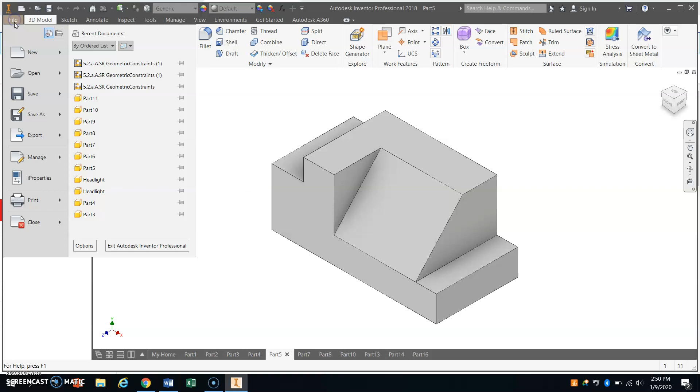We're going to show you another part here. This one's quite a bit more complex and involves a few more tools that we haven't used so far, some parts that maybe you didn't even know existed. So we're going to create a millimeter part.

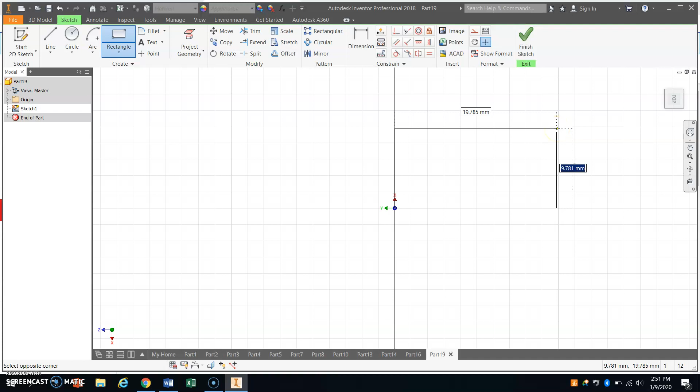We're going to start with the sketch. I'm going to work off of the ground plane to begin with. I'm going to grab my rectangle tool, make a 2-point rectangle, and it's going to be 53 by 26.

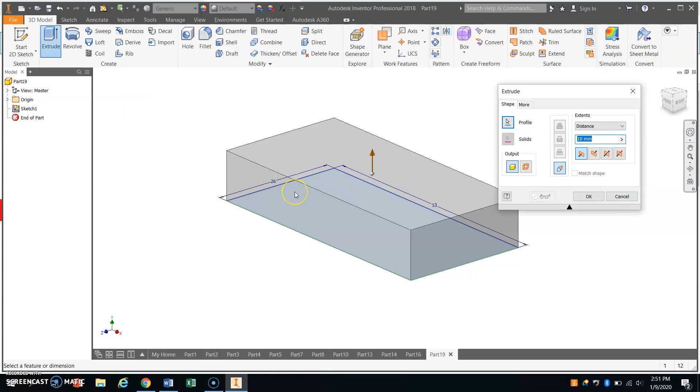I'll fully constrain. I'm going to finish sketch. Drag it in where I can see it. And I'm going to extrude it up, and it's going to extrude up 26 millimeters. All right, I'm going to work pretty quick here.

Next sketch I want to make, I want to sketch on this face because I'm going to take a line tool. I'm going to sketch from this corner. I'm going to bring it up here. I'm going to make this into a giant wedge.

All right, so got my line drawn. It coincides with the origin, and it's coincident with that top line. So I still just need to dimension where that line ends, and that should be 5 millimeters.

All right, looks good. We'll finish our sketch. Let's go to extrude. Now we're going to try to grab just this part, and sometimes it can be a little bit tricky grabbing just those parts.

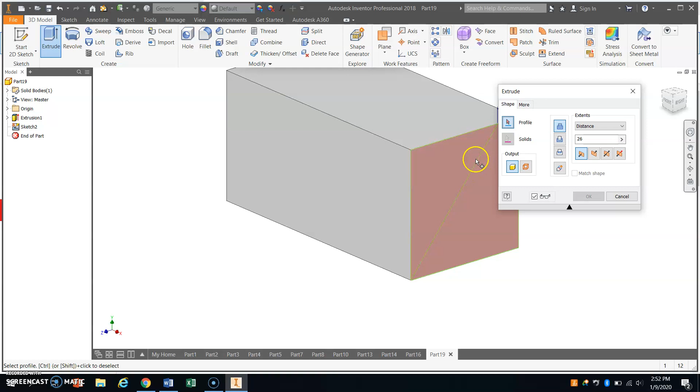If that's the case, what you can do is undo, hit the undo button to go back into sketch, highlight a line that doesn't touch or cut into this area. So I'm going to be safe and select this line.

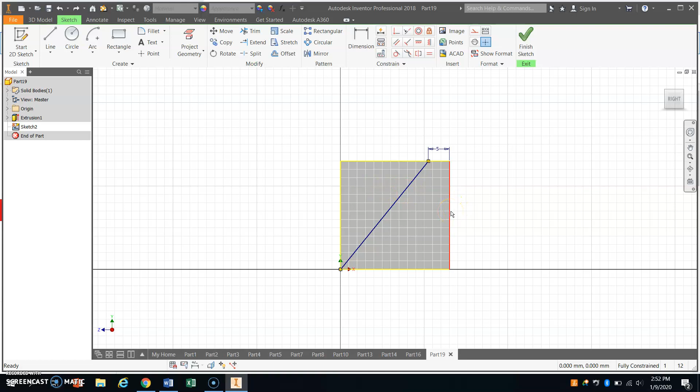When I hover my mouse over that line, it turns to red. I'm going to right click as it turns to red and click delete. That's going to delete that line off there. That's going to make it much easier for me to grab just that shape.

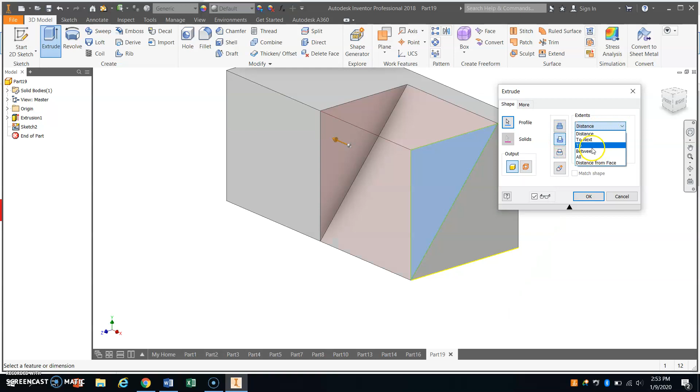So I'm going to go to extrude. You can see that it only grabbed that shape. I'm going to go to cut, cut all. All right, so we've done this part before. All right, that looks good.

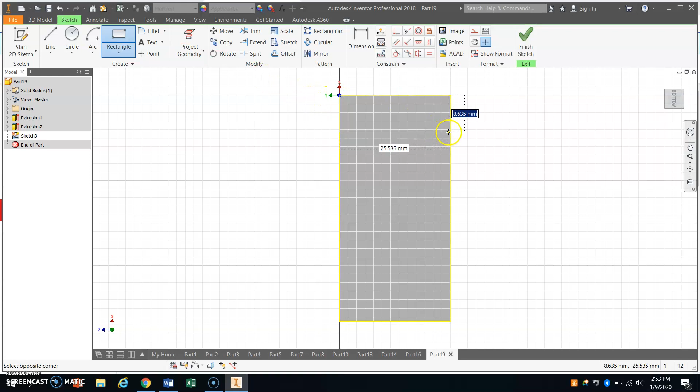Now what I'm going to do is work from the bottom. I need to see this bottom edge. I'm going to start a sketch right on the bottom. I'm going to grab the rectangle tool, start in the corner, bring it down, bring it all the way out, make sure it's coincident with the other side, drag one up this way.

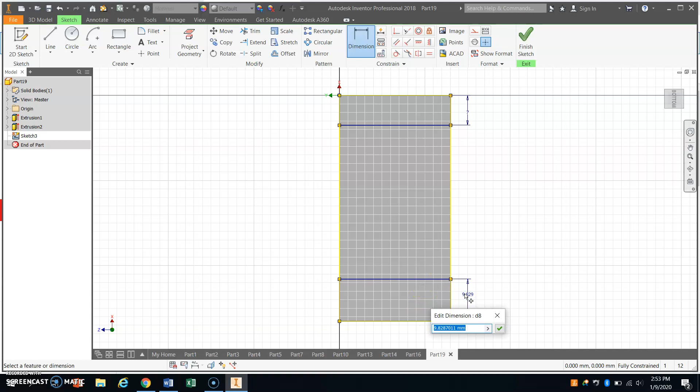Now all I need to do to fully constrain it is dimension how far it comes down. So from this edge to this edge, drag that out, and that should be 7 millimeters. Same for down here, from this edge to this edge, drag it out, click it again, 7, enter. So that's all fully constrained.

Now I'm going to click extrude, and this time I'm going to highlight this. I'm going to hit the shift key, highlight this. Now you can see it's sending it down like a couple of legs.

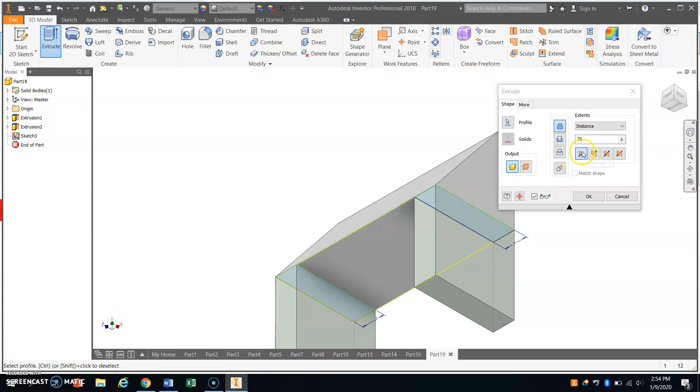I can change the direction the extrusion is going. Here's direction 1, direction 2. I'm going to go the other direction, direction 2. Now it's going to default to cut because it's going through this other material.

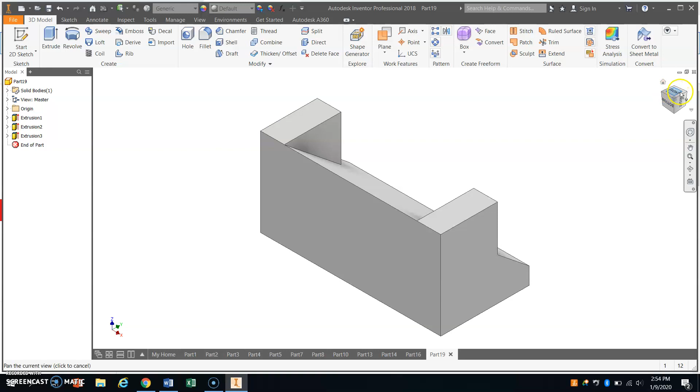I don't want it to cut. I want it to join, but I don't want it going 35. I want it going 16.7. All right, there we go. That's what I'm looking for. I'm not looking for that angle though. Come on, Inventor.

All right, that's what I'm looking for. Now I'm going to go ahead and sketch again, this time on this top plane.

I'm going to grab a rectangle tool, and I'm going to draw two rectangles, one right there, one right there.

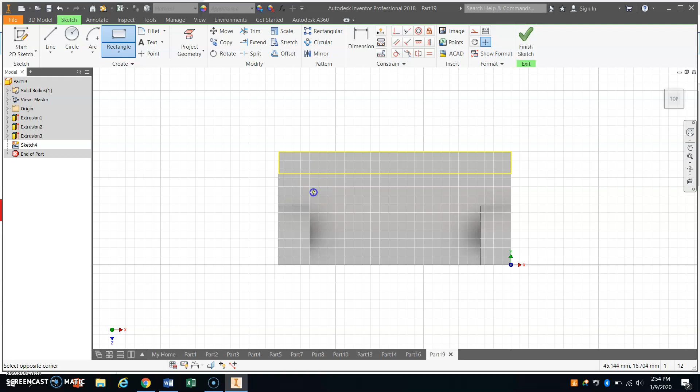Now you can see that I'm not staying within that face that I drew. That's okay, I don't need to. When I clicked on that face, it actually projected that plane out in an infinite direction. I could draw anywhere, even out over here if I wanted to, but I don't want to, so I'm going to undo that.

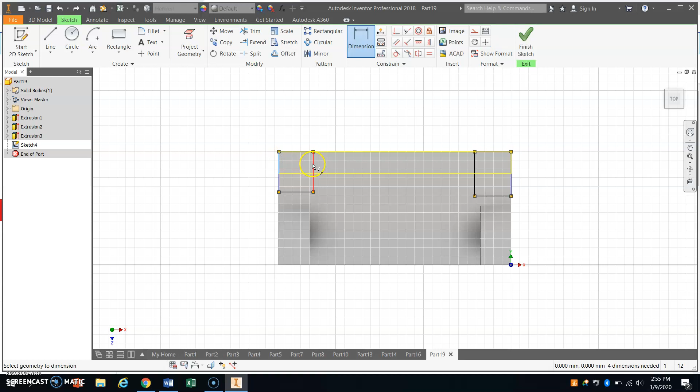All right, so I'm going to dimension this. I'm only going to dimension the width of this rectangle right here because I don't know how long it needs to be, but I know it needs to be 11 wide. And this one is also 11 wide. I'll bring that up, 11.

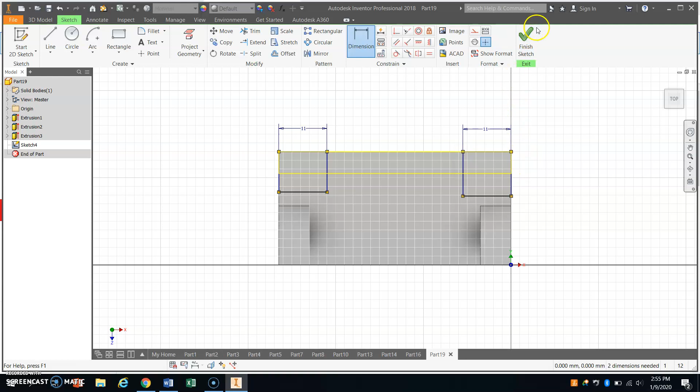And you're going to say, well, wait, don't you always have to be fully constrained? Well, yeah, that's best practices, but sometimes that doesn't work. Because I wasn't given the dimension in the plans for how far that goes.

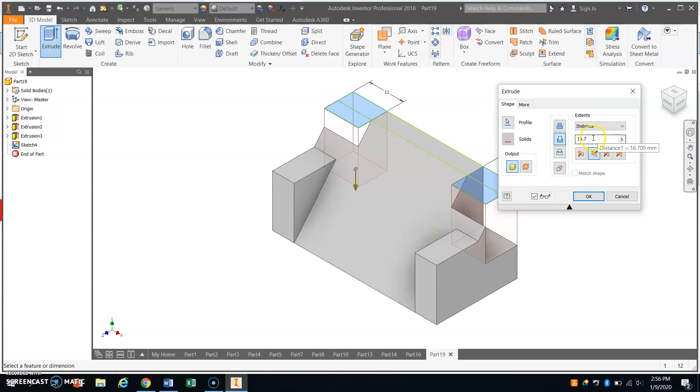So I'm going to grab those two that I just made, hold down the shift key, select that second one. I don't want it to project up, I want to make it a cut, and I don't want to go 16.7 deep, I just want to go 5 deep.

So see, I wasn't given this dimension, so I didn't know how big to make it that way, but that's okay, we made it work out.

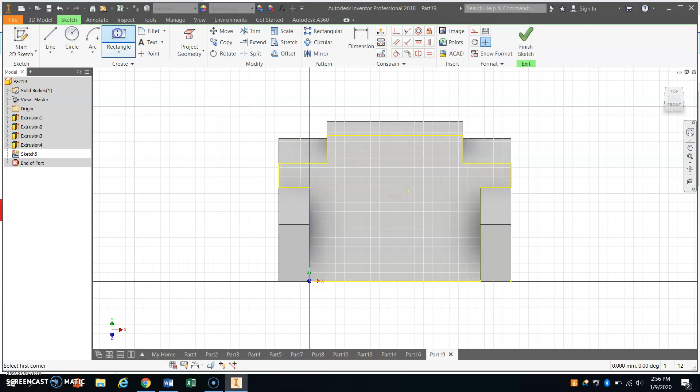All right, the next part of this is a little bit tricky again. This time we're going to sketch on this angled face, and we're going to cut a hole, but we don't want to cut a hole that's going to go through at the angle that we're going to make this drawing. So I'm going to show you how to project some geometry onto a plane.

So I need to make a rectangle, well, a square is a rectangle, that's 17 by 17. Now I need to locate it, so I'm going to come up here to dimension. I'm going to locate it from this side of the square to this side right here, and that should be 11. And then I need to locate from this side of this to this line, and that needs to be 7.

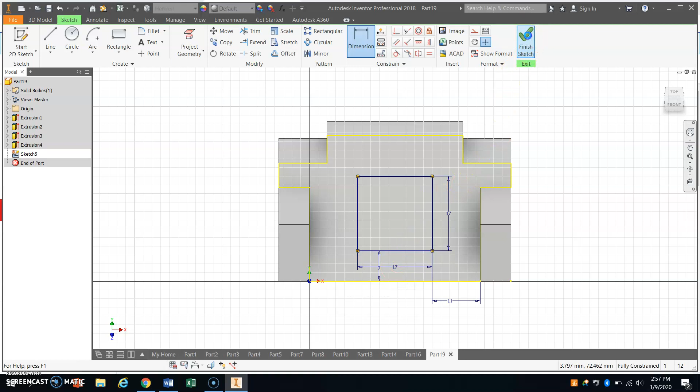All right, so now at this point I'm going to finish the sketch. Then I'm going to start a new sketch, and this time I'm going to click on this face right here. And like I said before, that creates this entire plane across here.

So with that selected, I'm going to go to project geometry, and then I'm going to go around my square, and when my blue line changes to red, I'm going to click on it, and it's going to change to yellow. And when I move off, it's yellow.

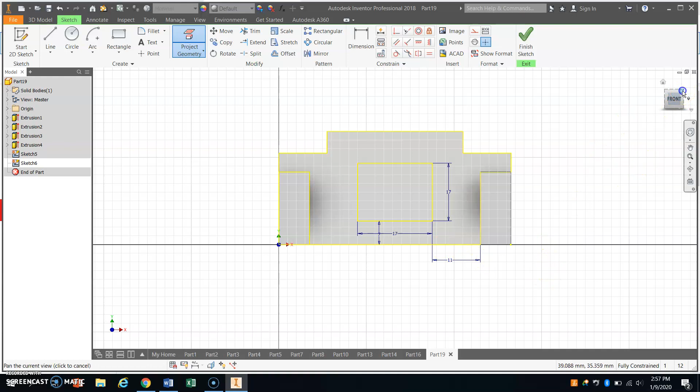And if I come out here and right click OK, that lets go of the project tool, and you can see that now I have this rectangle drawn on this plane that includes this face. I'm going to click finish sketch, and now I want to make my hole that's going to project straight through, so I'm going to go to extrude.

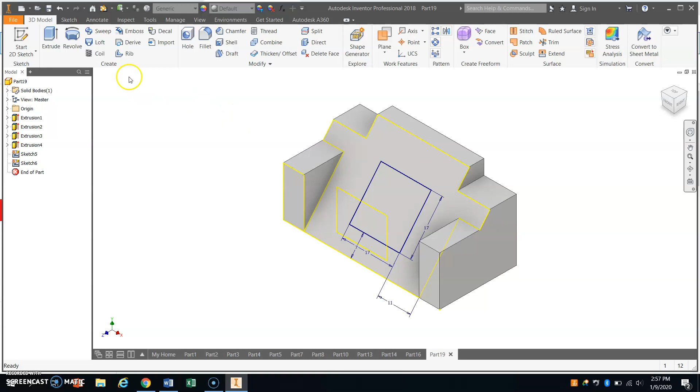I'm going to grab this face right here, I'm going to make it a cut, I'm going to do all, and now I have exactly what I wanted.

I'm going to go over here and hide the visibility of that sketch. And there you go, that's our new shape.

I hope you enjoyed learning a couple of new tools: projection, and the fact that you don't have to draw just within the face, that it actually creates an entire plane that you can draw on.